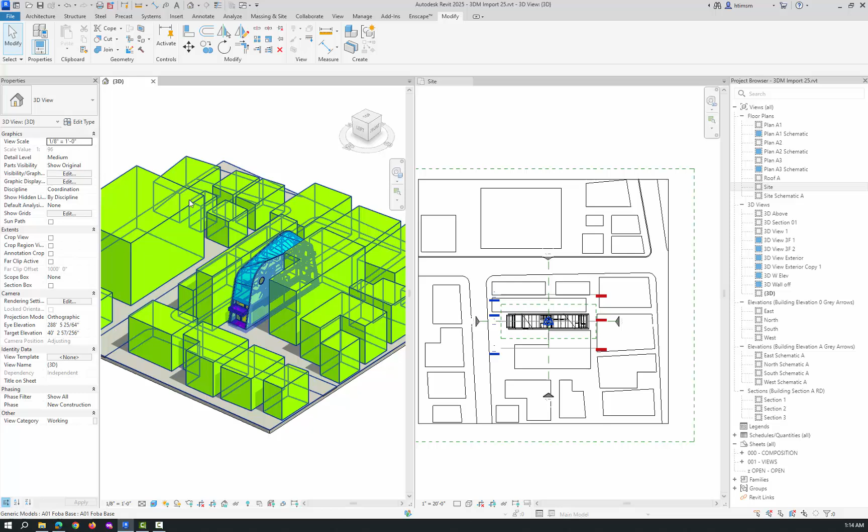So the next thing we're going to do is create the masses, these mass buildings, using the existing file I gave you. Go to the architecture component and model in place. For a category, we're going to pick site and click OK. I'll name this building mass.

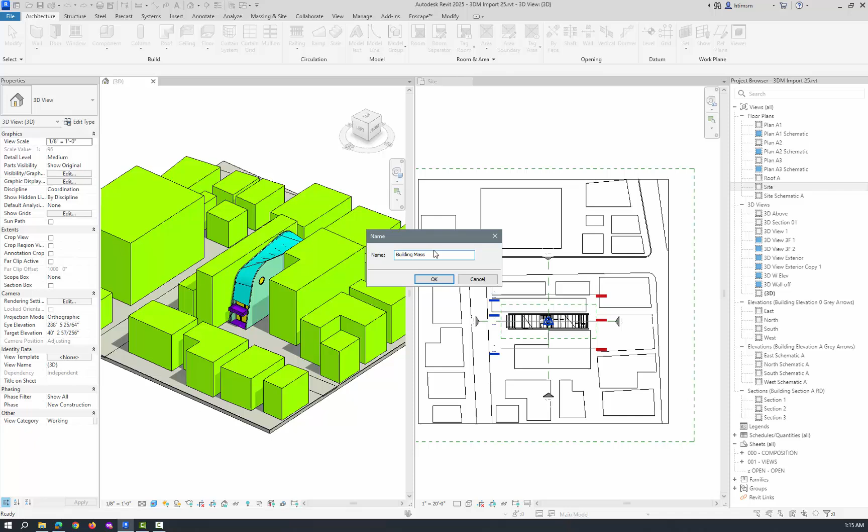Click OK, and it sends me into sketch mode where I can make an extrusion for each one of these. If I go to extrusion, it's going to start at -6 and end at 15. Yours probably says 0 and 1 inch, but if you adjust the start to -6, it'll start below the current level, which is Plan A1, -6 inches. Then I just put 15 because I'm not sure, some of them are different sizes, and I thought that would be a good place to start.

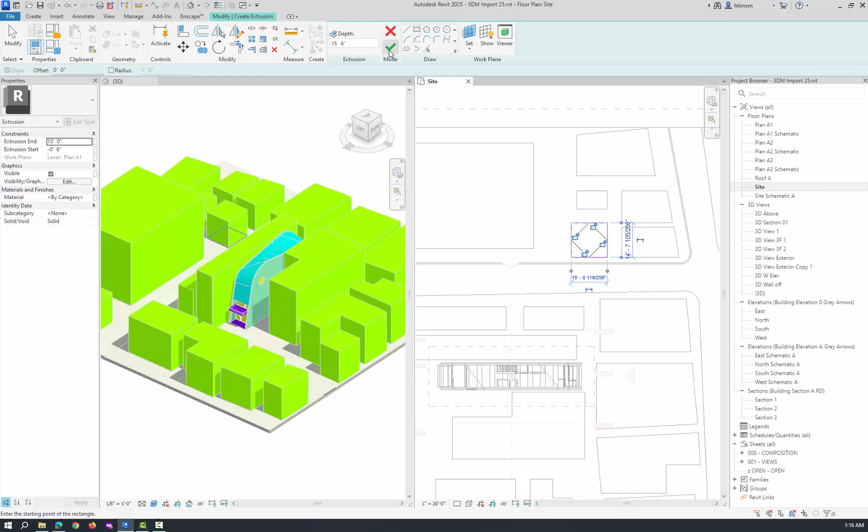Then I'll come over here and go to the rectangle and draw one rectangle. Once you get one done, you can do multiples, but go ahead and just do one because they're different heights and we need to adjust them individually. I'm just going to hit check there. You'll see it over here creating that piece, and you can sometimes pull it up and it will find the top. But if you can't, I'd suggest using the align command - it's very fast. Align with the top of that.

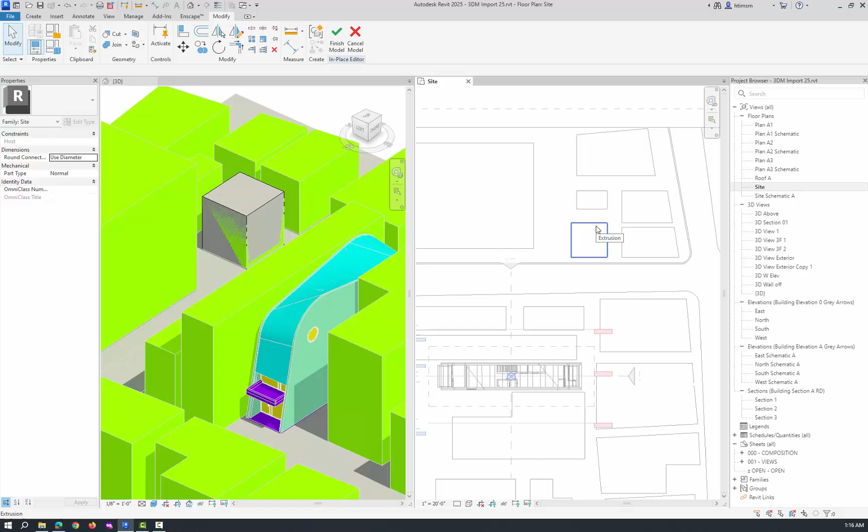Now what I'm going to do is come into my site plan and pick this guy. Instead of creating an extrusion and going through the command process again, I'm just going to copy this one to all of the ones that have 90-degree rectangle shapes. There's one, this guy, this guy, and that guy. I think that's it for just the rectangular ones.

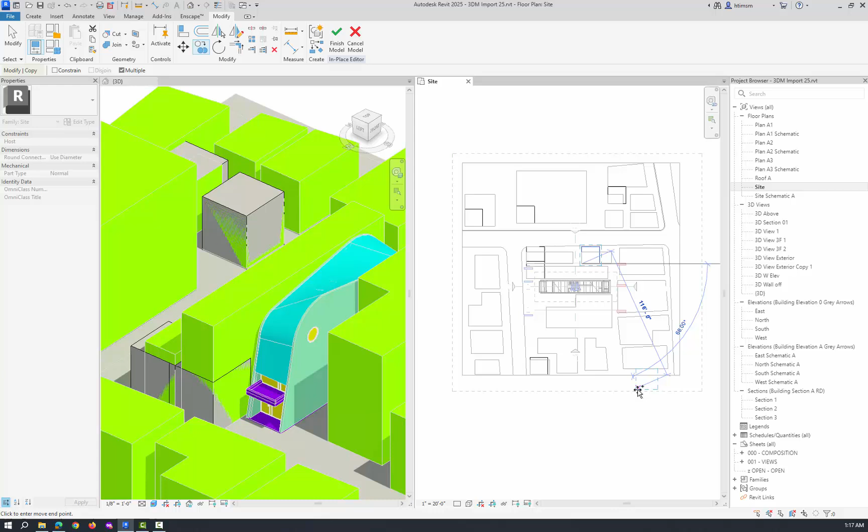Then I'm just going to use the align command again to snap these guys into place - just 2 clicks to get each one where I want it, and it's much faster than creating. When you get into digital work, basically editing is almost always the better option as opposed to creating something. Creating usually takes quite a bit longer than editing, depending on the program you're using.

The next thing I'll do is grab this guy and copy it from here to here. Now this one has a different topology, a different shape, so it doesn't align the same way. But I can pick it and edit the extrusion, which gives me the outline again, use the pick line, then TR for trim, trim that out and trim that out, then get that guy and check.

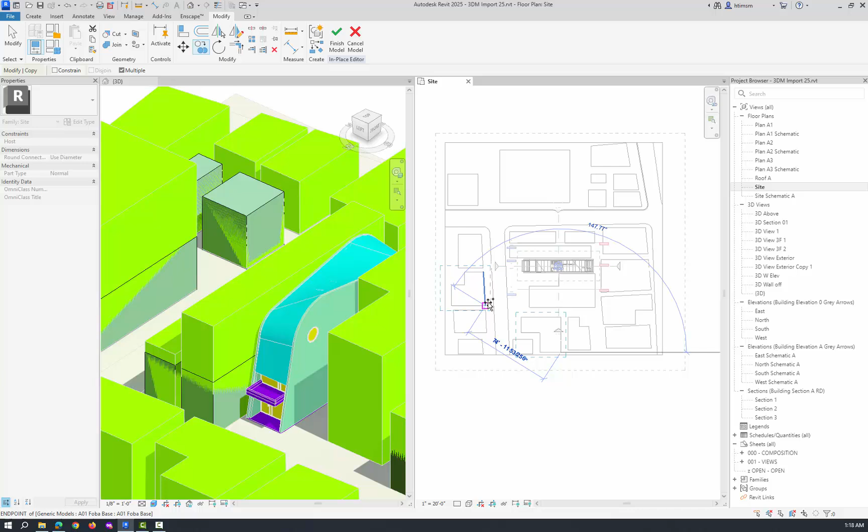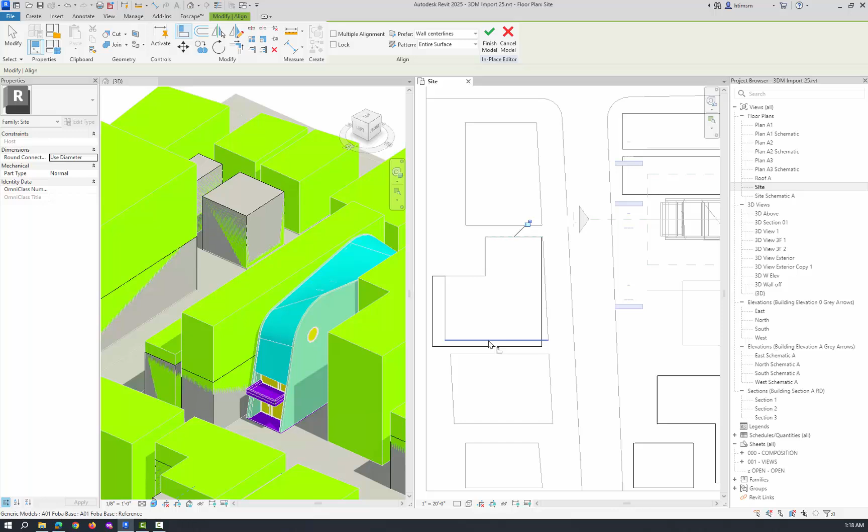It's kind of up to you how you want to do this. If I take this guy and copy it over to here, and rotate that 90 degrees, then I can pull it or use the align command - AL is a shortcut to get that guy into place. Sometimes it's like this one, because I have to pick it and edit the extrusion to change the angle.

Sometimes it might be faster just to do the create extrusion and use the pick line - 1, 2, 3, 4, check. Then you can right click and repeat the solid extrusion command, pick line, 1, 2, 3, 4, and check. Again, right click, repeat solid extrusion. It's all about finding the best process and the quickest process to get it done.

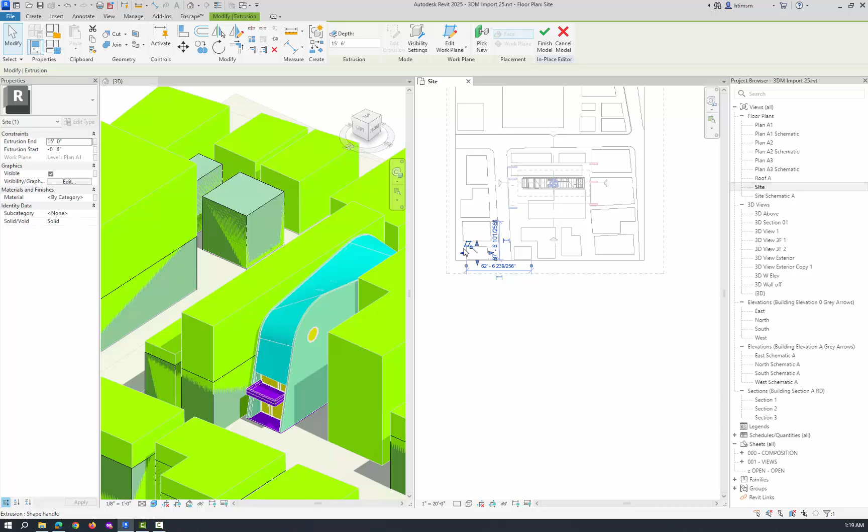Okay, so you can see I'm creating these guys over here. I'm just going to go and finish the model for right now. I know I don't have them all, but let's finish that.

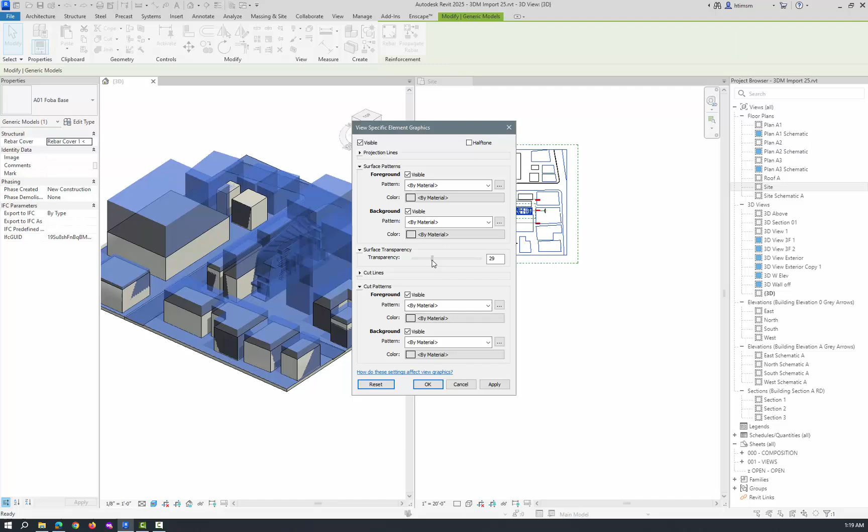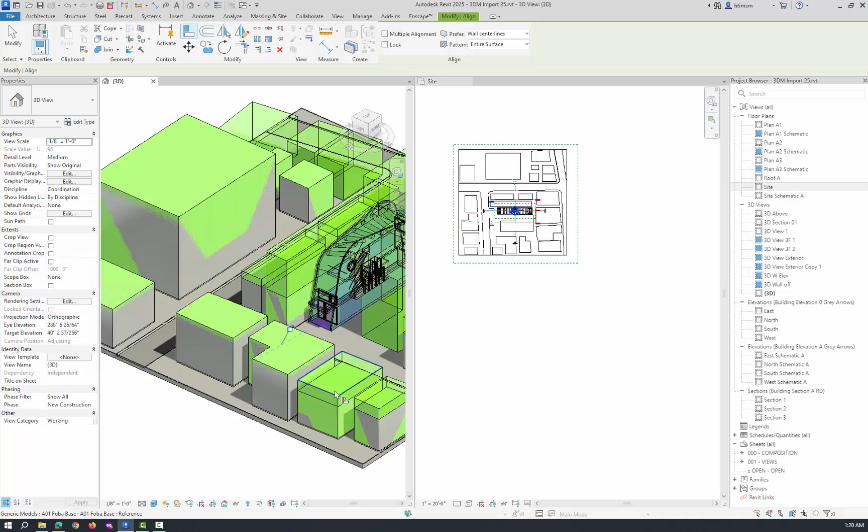I'm going to pick this guy, right click on it, and override graphics and view by element, and make it just a little transparent so I can see through it. So I can go align with that, align with that, align with that, and just quickly go through and get these guys where you want them, being as quick as you can.

I'll go ahead and leave these. I'll stop this and complete it, and then I'll come back and we'll put a material on it.